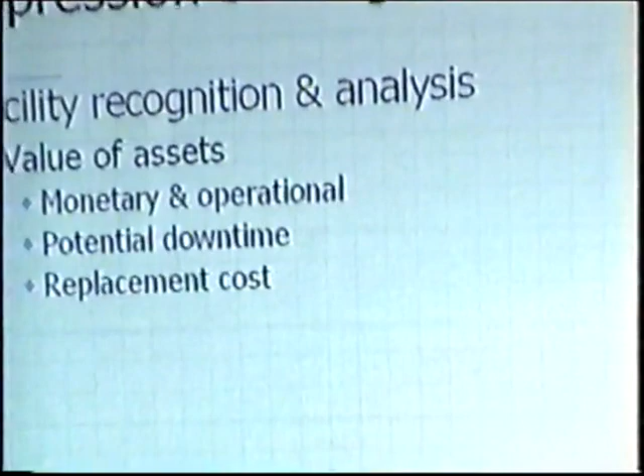So really what we're talking about with suppression strategies is facility recognition and analysis, where we look at value of assets, both monetary and operational, the potential downtime aspect, and then what the replacement costs are.

You may be able to replace certain things, but it's how long is it going to take and at what price. I know from my friends that work in the IT industry, even when they do an upgrade on the computer system on weekends that's supposed to take 2 hours, it usually takes 2 days. So nothing ever works right in bringing that up.

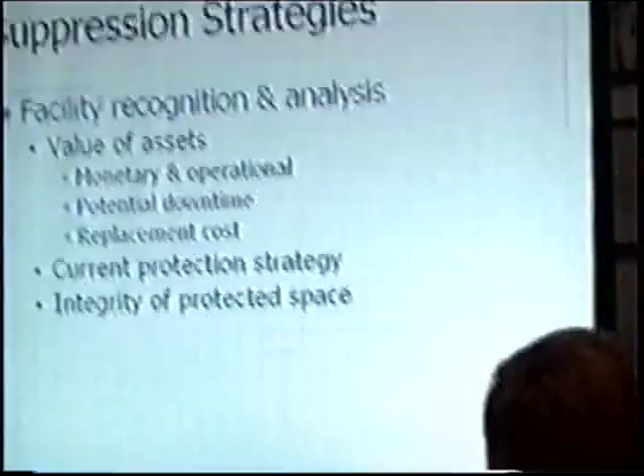Really, what you also want to look at is the current protection strategy that's employed. When looking at clean agent systems or waterless fire protection, you need to look at the integrity of the space, whether it can be sealed to hold the retention of the gas for a certain period of time.

Right now NFPA 2001 says gaseous agents shall hold for 10 minutes, but the authority having jurisdiction can reduce or increase that time as they see fit. I've seen authorities having jurisdiction go out during rush hour to the closest fire station to the site they're signing off on, and drive it. However long it takes them to get to that site is what the time's going to be. So it really depends.

Anytime we're putting any system in, we always have to check with regulatory and insurance influences. FM might want one thing, the authority having jurisdiction might want another. We're also going to look at the total cost of ownership and the overall risk within the facility.

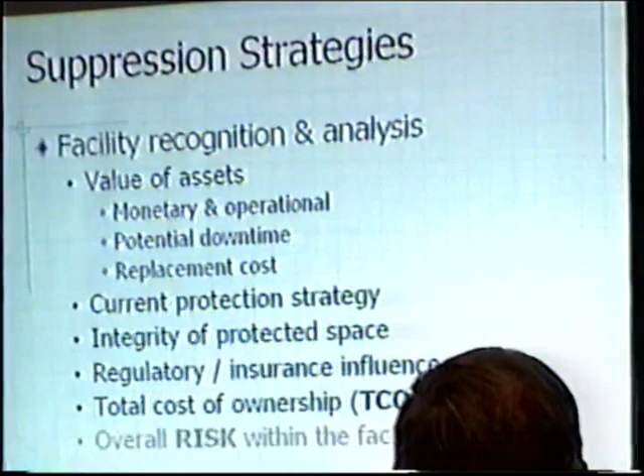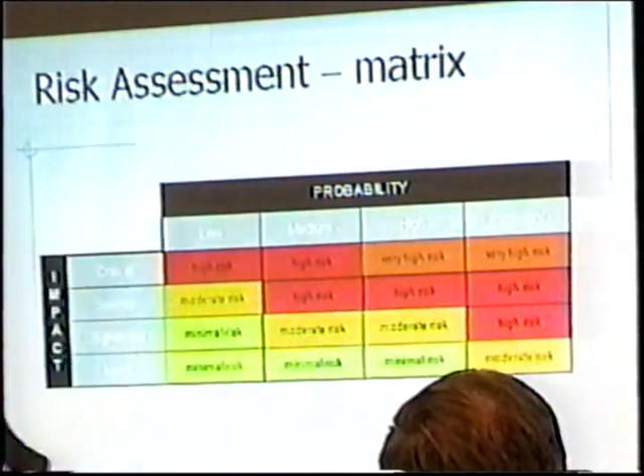This is a matrix that a lot of risk analysts look at when assessing a certain area, looking at probability versus impact. When we're looking at waterless or mission-critical type facilities, we're looking at facilities shaded in red or orange that may pose a probability that something might not happen, but if it does, it will definitely impact the business in a serious or critical nature.

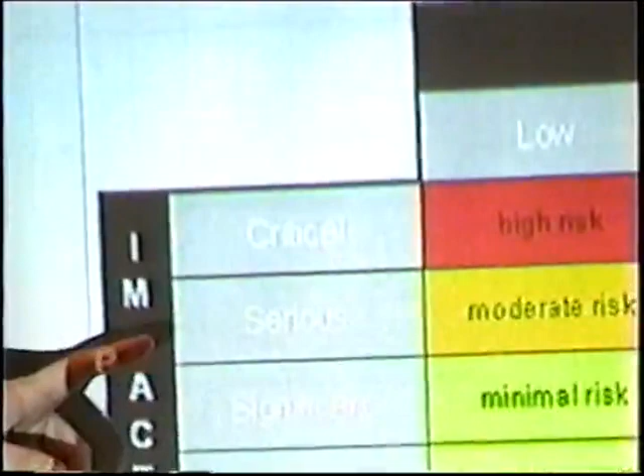Or you might have something that has a high probability of happening, and it may have a critical or minor type effect on the company itself.

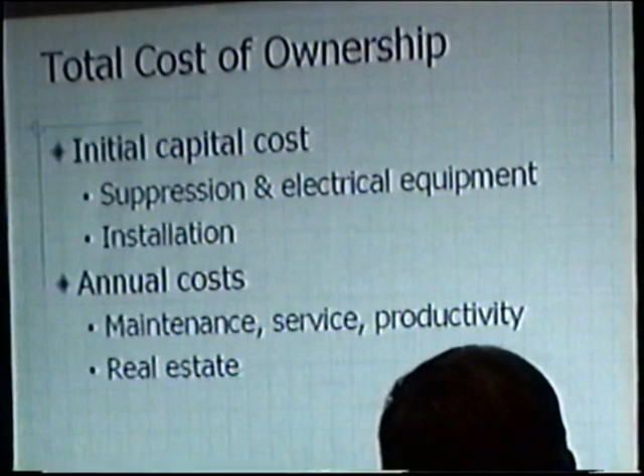When we're looking at total cost of ownership, we're looking at how much it's going to cost to initially install the suppression and electrical equipment, and how much the equipment itself is going to cost. But then also you have to look at the total cost of maintenance, service, productivity, and even some of the real estate that gets taken up.

Some of the total costs associated with system activation could be detrimental depending upon what system you choose as your method of fire protection, or if you choose fire protection at all.

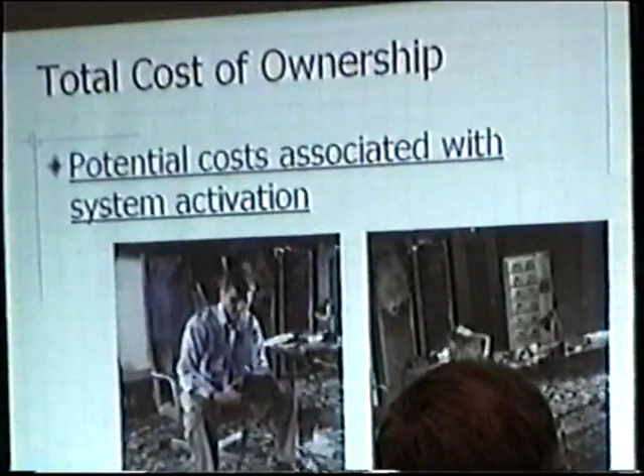So you may have some customers that don't have any protection. You may have some customers that say we're going to put in detection only - spot type detectors, air sampling, or something else. Then you have some customers that will just put in what's required by the International Building Code or local building ordinances just to get occupancy.

And that could be just putting in water-based systems, either wet or pre-action. But then, some companies, and most companies that have mission-critical facilities, are looking at putting in waterless systems or a clean agent.

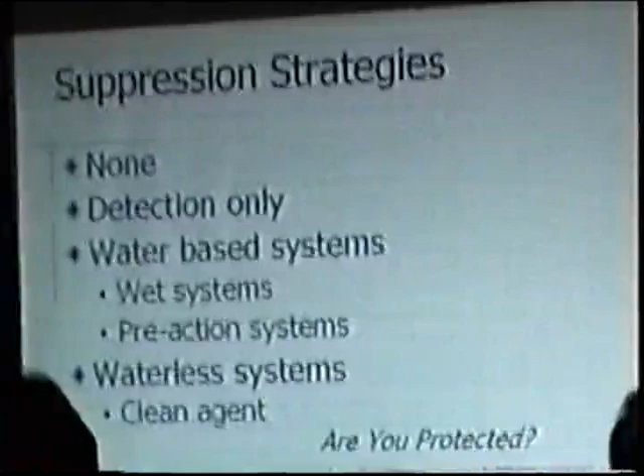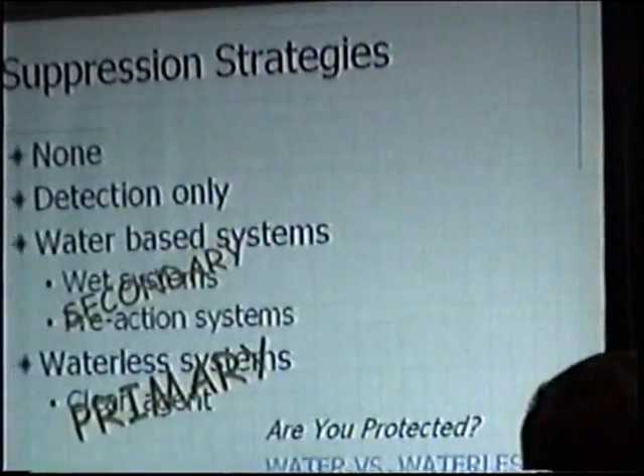This kind of goes back to what I said at the beginning, where waterless and water-based systems can work together - where your waterless or clean agent system could be your primary form of defense in stopping, or actually putting out, a fire and getting the customer back up and running in a timely fashion. But if something does happen where the fire grows to a catastrophic point, you want to have a pre-action or wet system as a backup.

And preferably, if we're going to be using sprinkler systems, you want to put a pre-action system in there just to keep the water back, because everybody's always afraid of a leaking pipe or something else happening in their data room.

So I have a quick video - I didn't bring my speakers, so I hope you guys can hear this. Some of you may have seen this. I'm only going to show the first few minutes, but it just shows the difference between having a water-based only system versus a clean agent as a primary output.

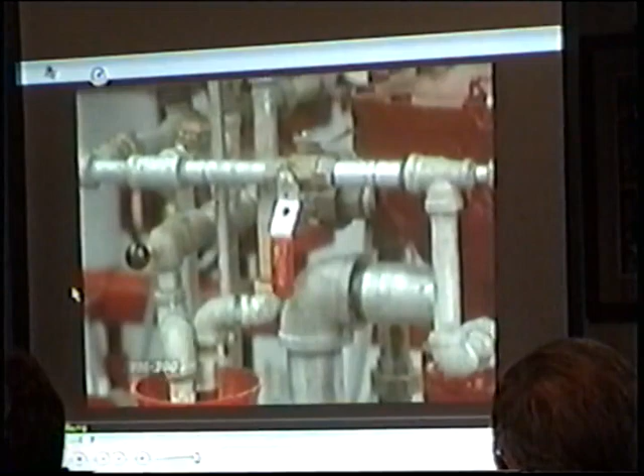After hours, suppose an electrical malfunction inside an equipment cabinet causes a spark to ignite. At 1 minute and 51 seconds, the system's detector senses smoke, sets off an alarm, and charges the pipes with water.

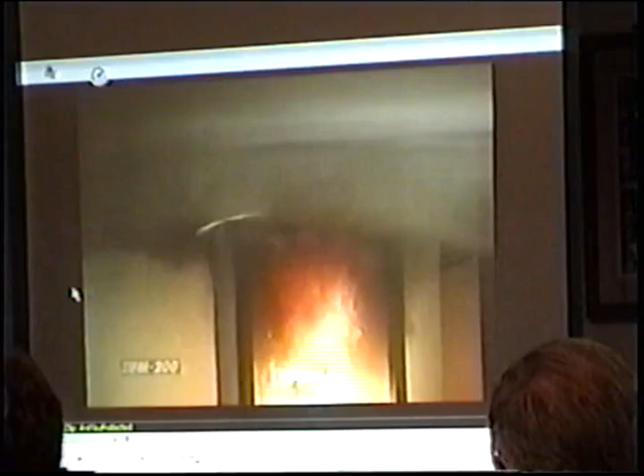As the fire continues to grow, the temperature of the ceiling directly above it will climb slowly until it is more than 500 degrees. The equipment inside the enclosure is now completely destroyed. Still, the temperature at the nearest sprinkler head stays below what's necessary to initiate the release of water.

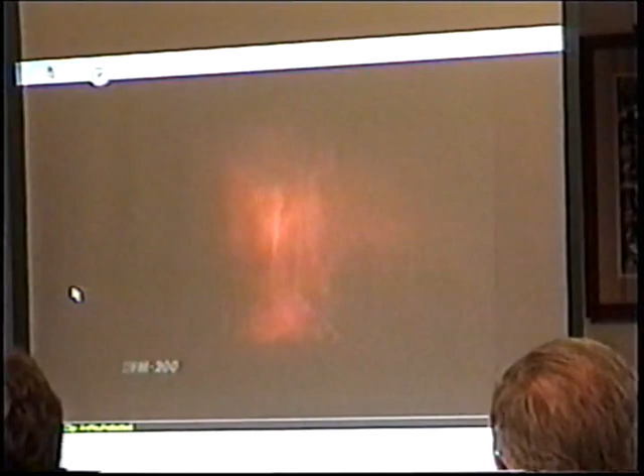At 9 minutes and 46 seconds, the sprinkler bulb bursts. Water is released at a flow rate of more than 18 gallons per minute. The room fills with smoke until there is no visibility. The infrared camera detects the flames contained and shielded inside the metal cabinet.

At 17 minutes, a firefighter arrives to investigate and finally puts the fire out.

The automatic sprinkler system in this office worked exactly as it was designed. After the fire grew large enough, it provided the minimum protection necessary to slow the fire's growth until the firefighters arrived to put it out. But the result of this minimum level of protection was an unacceptable level of damage to your business.

Chances are it would have saved your building and the lives of your employees. But would it have saved your business?

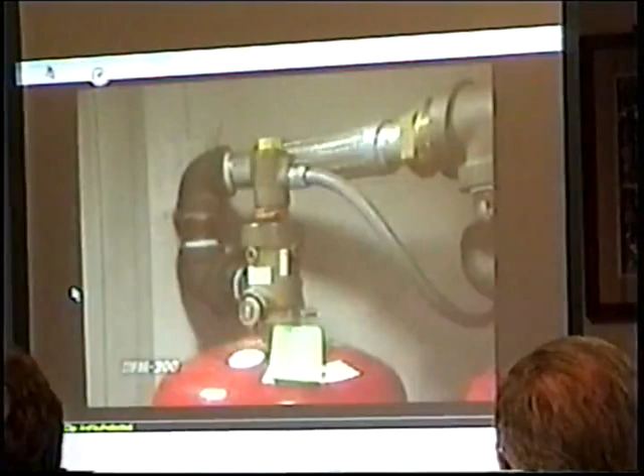Suppose instead you had an FM200 waterless system. Now this could be applied to any waterless fire suppression system. Suppose again it was after hours and an electrical malfunction inside an equipment cabinet causes a spark to ignite.

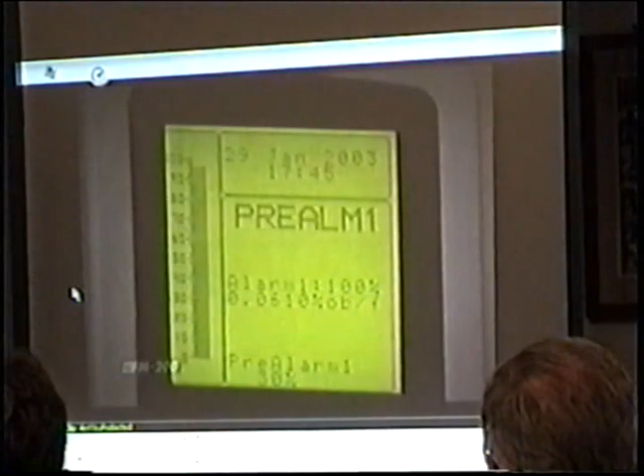At 32 seconds, the system's detector senses the first whiff of combustion. At 1 minute and 3 seconds, a first alarm is sounded. At 1 minute and 35 seconds, the system sounds a second alarm and begins a 30-second pre-discharge countdown.

At 2 minutes, 5 seconds, FM200 is released. 10 seconds later, the fire is out. An FM200 system provides maximum protection, resulting in minimum damage.

So that just kind of shows you the difference between a waterless system versus a water-based system. And the only reason that the water-based system didn't work in that particular scenario was because the cabinets formed a shield, so it wouldn't have penetrated the cabinets, where a gaseous agent, as it circulates through the whole entire room, gets into every nook, cranny, opening, or whatever to put out that fire.

So, like I said, we always suggest to any end user that we do business with, or that asks our opinion, that gaseous agents should be a primary form of putting the fire out, always backed up by a pre-action sprinkler, because really the sprinkler system is basically for structure and life safety, for structural integrity, where the waterless system is more concerned about the assets.

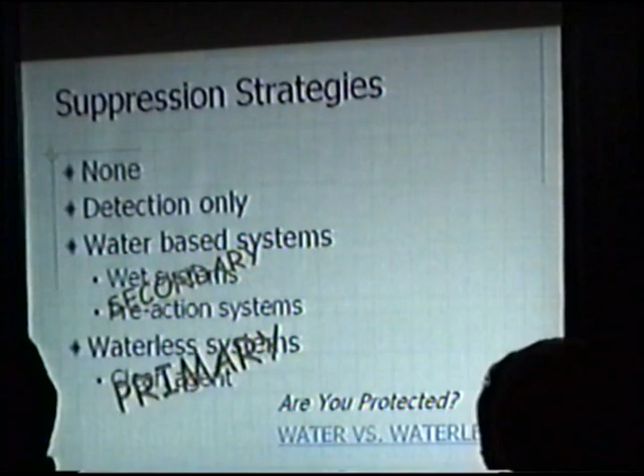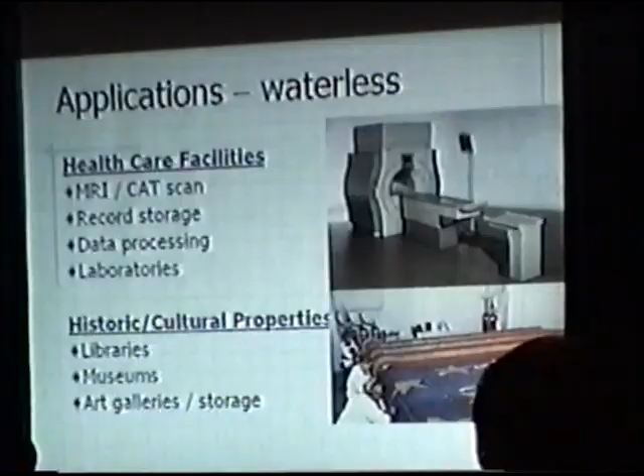So just some applications where we use waterless fire protection, clean agent systems: data processing, telecommunications, power gen, marine, industrial applications, healthcare. We use a lot of stuff in MRI facilities, record storage, especially with HIPAA. HIPAA in the healthcare industry is probably the biggest thing.

Every time you go to the doctors, they make you sign the form, or they don't divulge your information to anybody else other than you. Well, they also have a responsibility of keeping your records secure for 7 years, and that means from a fire protection aspect and from a security aspect.

So also the healthcare facilities are getting more IT-based. There's a big movement within the healthcare facilities to make your experience from the time that someone picks you up in the ambulance to the time you get to the hospital completely computerized. So they'll be able to zap your EKG and various other types of things right to the hospital before you get there.

They'll be able to assess what you need and then be able to roll the appropriate equipment in before you even get there and assign a room. And then also be able to use the data processing for in-home care. So if a physician or an in-home nurse comes in, they can look up that patient's records, see what their prescriptions are, whatever else they need to be taking.

So healthcare is becoming very much IT, and I don't know if you've been paying attention to the news, but I know that the new administration is concentrating heavily on infusing money into the healthcare system, for upgrades and various other things, not only just providing healthcare to everybody.

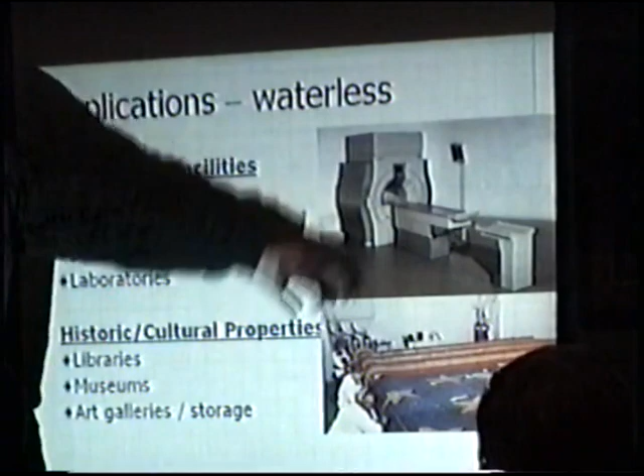One other story about healthcare: there was a fire, or an event, with an MRI unit where the board that moves the bed in and out of the MRI shorted out and started a fire. They couldn't get the guy out, but they had a gaseous system in there, and it put the fire out.

One big misnomer about gaseous systems is that people think they all take the oxygen out of the atmosphere. There are gaseous systems that do that when dealing with inerts like nitrogen, argon, CO2, and various other types. But clean agent gases like Novec 1230, FM 200, or others don't work that way - they extinguish by cooling rather than oxygen deprivation.

So is it still 5% concentration, or a little more? Different agents have different concentrations, and we'll go through that as we progress.

The first true clean agent out there, as far as suppression, was halon. It was fast-acting, minimal damage, safe for occupied spaces, but it had an ozone depletion potential. It was basically taken out via the Montreal Protocol back in 1988, and then finally phased out from production around 1991-92.

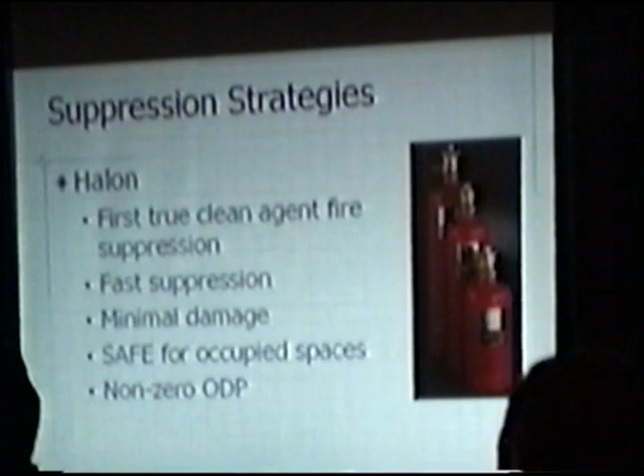So halon's still available, but only in a recycled state. Also, for guys more in consulting, telling customers what to do with their existing halon systems, a lot of manufacturers have stopped supporting the old halon systems. So rebuild kits or discharges - they may be able to source halon, but may not be able to rebuild the valves and put in the appropriate O-rings to bring that system back up and running. So halon is no longer available in brand new systems unless you're getting a used type system.

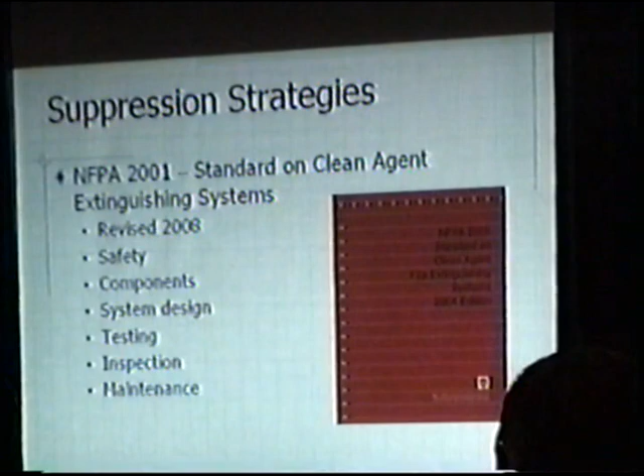Now, everything I'm going to talk about in the next few slides is governed by NFPA 2001. I believe Paul gave you a previous presentation with a synopsis on NFPA 2001, the standard on clean agent systems. It covers the safety, components, design, test, inspection, and maintenance of these types of systems.

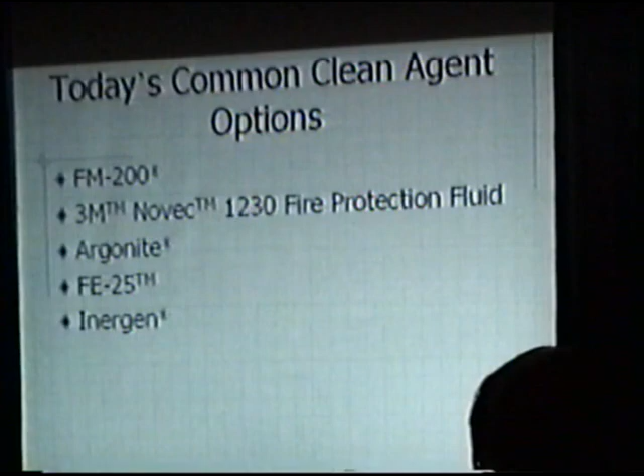Today's commonly used clean agent options are FM 200, Novec 1230, Argonite, FE25, and Inergen. Those are probably the most widely used that you'll see locally and nationally throughout the U.S.

Now, when talking about clean agents, one thing we want to cover is some different terminology I'll be using on a few slides. One is NOAEL, which is no observed adverse effects level. That means during testing, when they tested the agents back in 1992, when halon was being discontinued and they were searching for replacements, they basically tested it to a level where they didn't see cardiac sensitization.

And that is what they established as NOAEL, the no observed adverse effects level on the test subjects. Now there's a LOAEL level, which stands for lowest observed adverse effects level, which means they saw a blip. It could have been 1 out of 10, 1 out of 100, or 1 out of 10,000 tests. But what they did was establish that the minute they saw a blip, that's what they said was the lowest concentration at which they actually saw an adverse effect.

Then something new came out called the PBPK, the Physiologically Based Pharmacokinetic Model. You guys say that 10 times?

So what this is, it's a computer simulated test. It's kind of like saying, okay, this test tries to relate what the concentration will be at your heart at a given time for a given exposure period. But really this is more of a computer generated model. It's trying to say, if you have different subjects, someone who doesn't drink all the time versus someone who drinks every day, the effects are going to be different. But the computer model may say an average person weighing 120 pounds or 200 pounds is going to have this effect if they have 2 drinks in an hour. So that's really what it's doing.

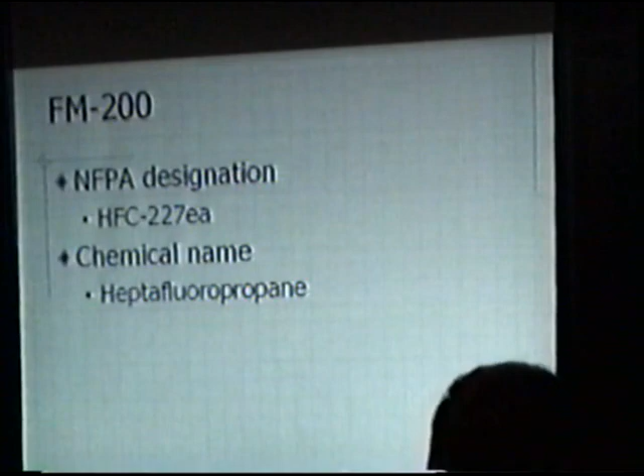So let's talk a little bit about FM200. FM200 has probably been the agent that's been out there the longest. HFC-227ea is its NFPA designation, also called heptafluoropropane. It's safe for occupied spaces and suppresses through heat absorption. The definition of a clean agent is that it does not leave a residue, does not conduct, will not wet or soak, and there's no agent-related downtime.

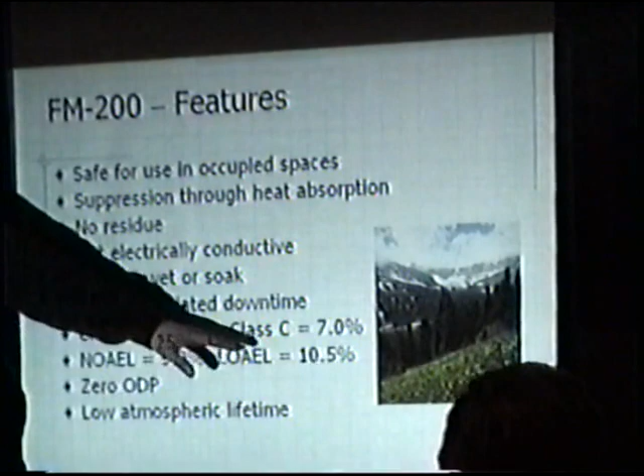Typically with the FM200 agent, the design concentration will be 6.25% for a Class A fire. For a Class C fire, the general guideline is a 7% design concentration. The no observed adverse effects level is 9%, and the lowest observed adverse effects level is 10.5%. So you have anywhere from the NOAEL level back down to the Class A level, about a 2.75% safety factor, and here about a 2% safety factor before you get to the NOAEL, and then even a 3.5% safety factor before LOAEL.

It does have zero ozone depletion potential. It also has a lower atmospheric lifetime than halon. Halon had an atmospheric lifetime of about 80 or 90 years. FM200 has an atmospheric lifetime of about 33 years, so it's still quite a bit.

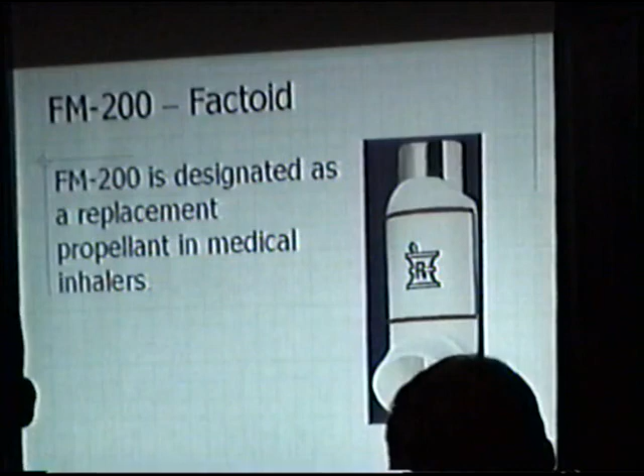Now, one thing FM200 has been used in is metered-dose inhalers as a replacement propellant, so it was tested by the FDA in medical inhalers.

Now, because FM200 has been on the marketplace for a long time, I'm going to talk a little bit about traditional delivery systems, and then some application-specific delivery systems you may want to be aware of. Traditional delivery systems are top discharge cylinders, bottom discharge, and spheres. Bottom discharge can be referred to as burst disc technology. And then we have application specifics.

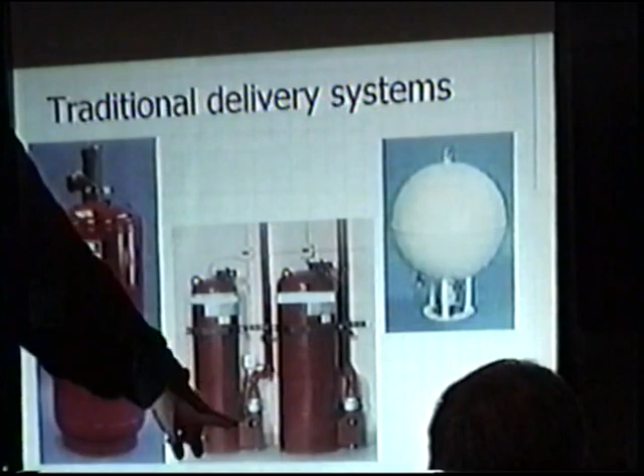So here is your top outlet cylinder. These would be your bottom discharge cylinders, hence they discharge from the bottom and have a burst disc in here. The spherical containers have a burst disc, which are either actuated by gas-actuated cartridges or initiators. The top outlet cylinders are mostly actuated by solenoids.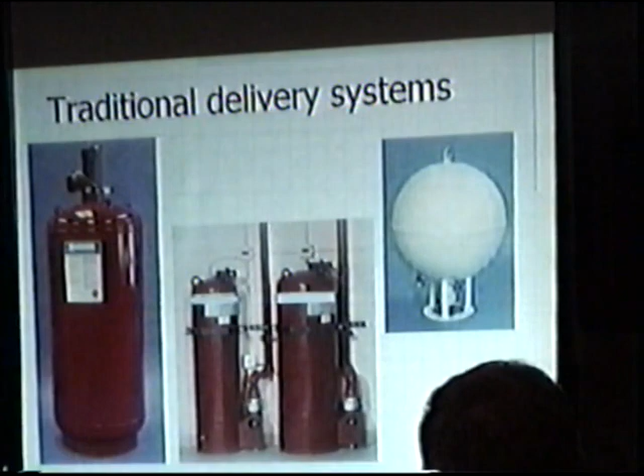Then you have agent or application-specific delivery, where you have complex pipe networks that may be a Halon 1301 retrofit, large open area facilities, or remote cylinder storage locations, where you may have a cylinder filled with FM200, and then a nitrogen propellant separate, which allows the agent to be pushed a lot farther than a standard system.

When you have a standard system, the tank may be filled to a certain percentage of total capacity, leaving only a certain amount of head space for nitrogen, which is pressurized at 360 psi. The minute the cylinder opens on a standard system, the pressure curve automatically degrades down to zero. So with a standard suppression system you may only push 50 to 60 feet of linear pipe, whereas with this type of system you may be able to push the agent 300 to 400 to 500 feet.

This is something to be aware of when doing Halon retrofits, because it allows us to use some of the similar piping that was used in the 1301 system. Although, I'll say this: there is no immediate drop-in replacement available for Halon 1301.

The reason is, I guarantee you, if you tested Halon 1301 to the standards that UL and FM and testing agencies put agents through today—flow splits, discharge time, arrival time balances—those old spaghetti Halon systems probably wouldn't work to today's standards. The only reason Halon systems worked back then was we were afforded the discharge test, which let us find out what the concentration was in a certain area. If we needed to bump up concentrations elsewhere, we could make modifications, add extra Halon to the tanks, recharge, and retest.

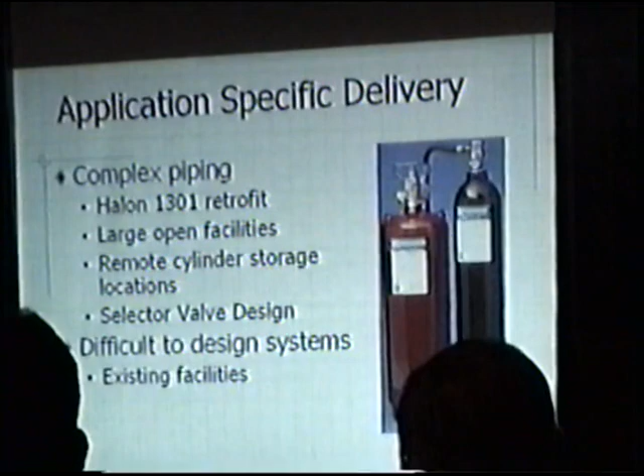With some application-specific design criteria with this particular array, you do have selector valve capabilities and also the capability of doing difficult design systems.

So how this works is you have gas and nitrogen in two separate systems. The nitrogen starts to discharge from the nitrogen cylinder into the FM200 cylinder itself, and then pushes it out—it's more like a piston effect.

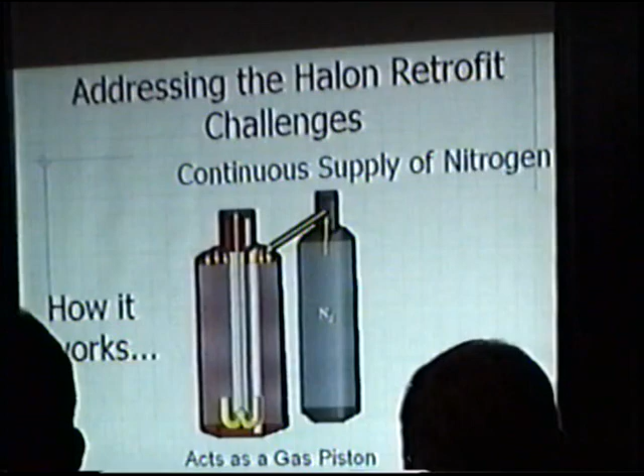What used to be a problem with Halon was that the cylinders were pre-charged, which became very hazardous to transport. That was a big problem. So if you're supplying separate nitrogen bottles instead of the actual storage tank, which is now no longer pressurized, it's easier to ship. The DOT qualifies hazardous goods for transport as anything over, I think, 7 or 8 PSI normal vapor pressure.

It still exceeds that—the normal vapor pressure of an FM200 gas is about 44 PSI. So you still have that residual problem; it's still stored or transported as a hazardous good.

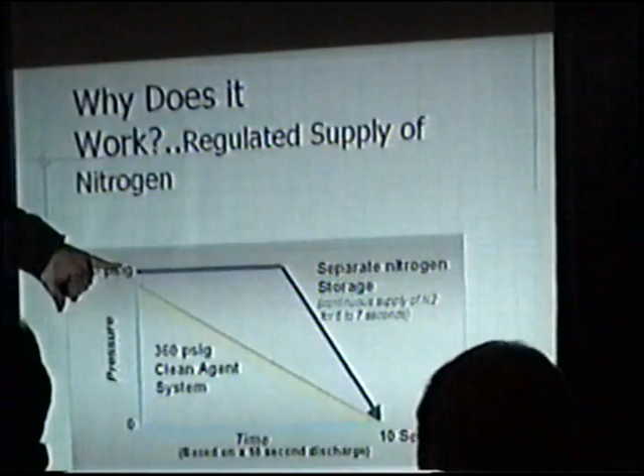This shows the difference I was talking about before: when you open up a standard system, the pressure automatically degrades, but we still have to make a 10-second discharge time. With the other system I showed, you're basically maintaining your nitrogen pressure for a longer period of time, but still maintaining your 10-second discharge time from delivery.

You also have application-specific systems with in-cabinet protection. Maybe a customer doesn't want to protect the whole entire area, but has a specific piece of equipment he wants to protect. You may see these in-cabinet systems on CNC machines, StorageTek silos, and various other hybrid applications.

So the strengths: cylinder storage space, rapid discharge and extinguishment properties, people safe, availability, field recharge support, and application-specific delivery. Weaknesses: recharge cost, and if you're using a traditional system, traditional system constraints.

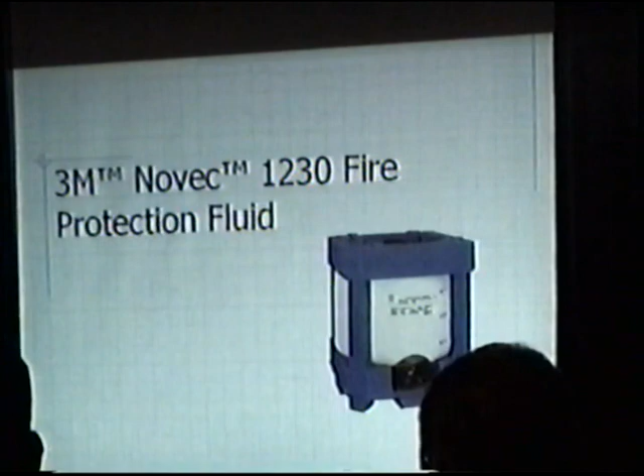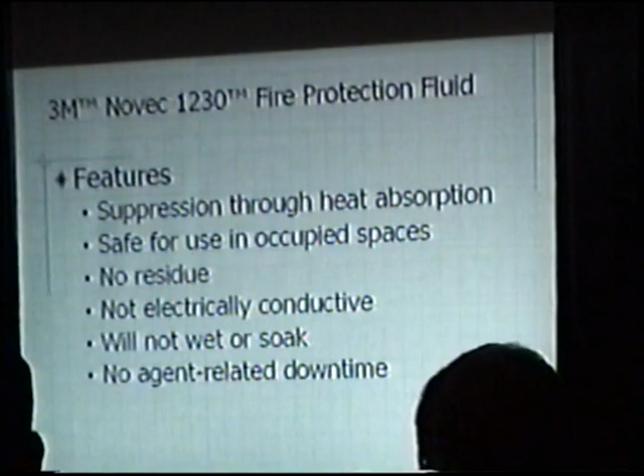The next agent available in the marketplace today is 3M's Novec 1230 fire protection fluid—its actual designation is FK5-1-12. It suppresses through heat absorption, so it does not deplete oxygen levels. It's safe for occupied spaces, leaves no residue, is not electrically conductive, won't wet or soak, and has no agent-related downtime. It's a liquid at room temperature.

How many people have seen Novec? Okay, I'm sure Paul here—everybody's seen it.

Basically it's a liquid at room temperature, but it wants to evaporate 50 times faster than water. So I can pour some off here, and I can see a vapor trail, even though you guys can't see this on camera.

So even though it exists as a liquid at room temperature, it wants to gasify. When it actually gets delivered through the nozzles, it atomizes into smaller molecules that allow the normal energy in the atmosphere to flash it into a gas. It's not like humidity, where if you lower the temperature it's going to drop down or condense over a period of time.

Now for Class A and Class C fires, this agent is rated for 4.2% by volume, so you still have 95.8% normal air in that room. Its NOAEL is 10%, its LOAEL is greater than 10%. This means we haven't really established an upper level yet, because the highest concentration I've seen for some of the most flammable liquids in Class B fires, and that's where your concentration levels will go up, is somewhere around 9%. So I think it's around 8.44.

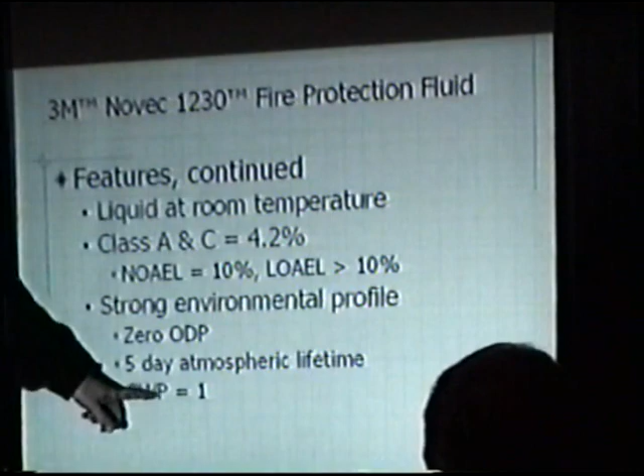The other thing is that the global warming potential is 1. I know there's a lot of debate today about greenhouse gases contributing to global warming, but this has a GWP of 1. Comparing it to FM200, which has a GWP of around 3,400, it's significantly better from an environmental aspect.

Now from a delivery system standpoint, this is a relatively newer product. It's been on the market since 2003, but traditional delivery systems prevail in its application. Not to say that something similar to what we saw with FM200 as far as delivery systems won't come out, but at this point you're dealing with a pressurized cylinder at 360 psi with the agent in it. The hardware being used is similar to Halon and FM200.

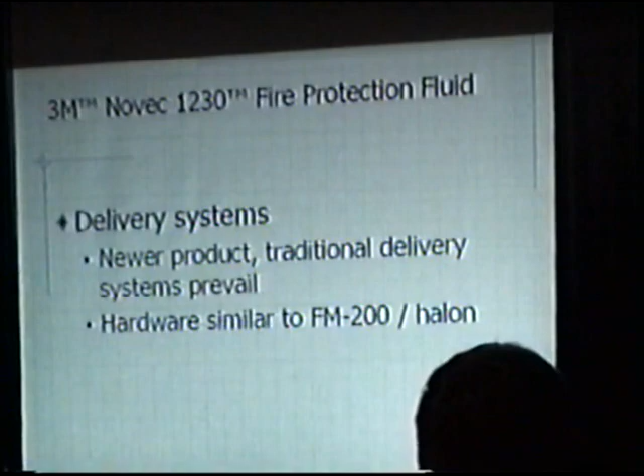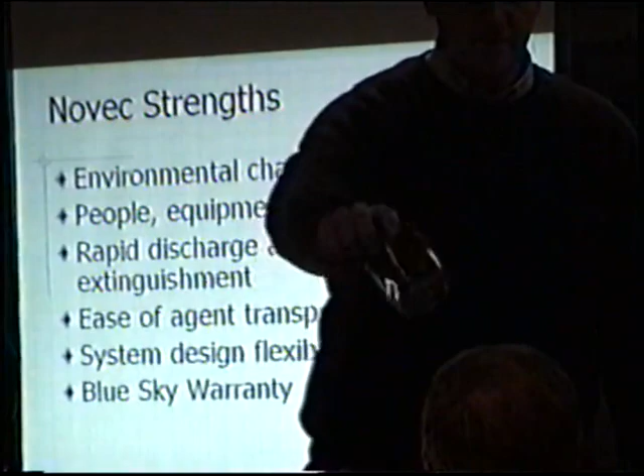One good thing about Novec is it's demonstrable. I'm sure you've probably seen this several times before, but I can just put a little drop in here. Shake it out. Nothing in there? Nothing on the sleeve? Nothing on there.

What you can see here is the smoke floating on top of the agent. That would actually represent your protected level, and anything underneath that protected level would actually be continuously suppressed. So if you had a 911 center or a data center or something else that they didn't want to shut down, that would continuously suppress that fire as long as the concentration was still in that room at that level.

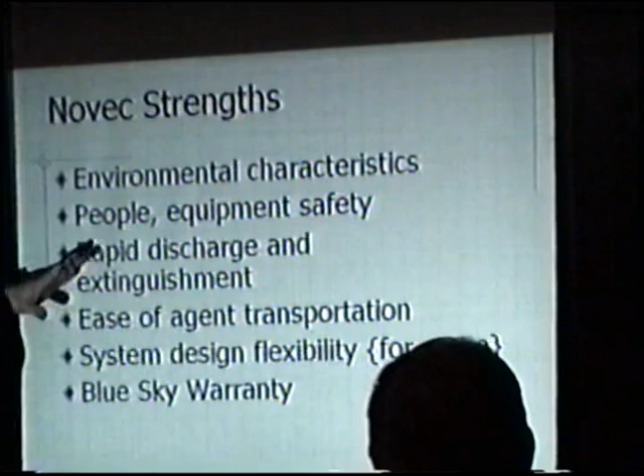So the strengths of Novec are its environmental characteristics, people and equipment safety, and rapid discharge. Again, it's going to discharge in 10 seconds. Now this is where this kind of differs from FM200 and Halon: the ease of agent transportation.

This goes back to your question, where if we ship Novec in its raw form, because it has a very low vapor pressure, it doesn't come under the DOT guidelines. So they could put thousands and thousands of pounds of the agent on a plane and ship it overseas, or ship it across the US and have it there the next day, or in hours, because it's not under DOT regulation as far as being able to fly. Whereas once you get over 350 pounds of something like FM200 gas, you have to truck it. So this is definitely a benefit when we're talking about that.

There is some system design flexibility, and it will vary by OEM, because Novec is just the agent. It depends on the performance of the system from the manufacturer that designs that particular system.

Another key part about Novec is that it offers the Blue Sky Warranty. What this is, more or less, is a backing. We hear about global warming potential, and we hear about agents maybe being phased out or going away. What the Blue Sky Warranty is saying is that if for any reason, when you install your system, in 20 years that system becomes mandated to be taken out, kind of like Halon was -- if legislation requires its removal, 3M will actually pay $18 a pound, I think that's what the going rate is in the Blue Sky Warranty.

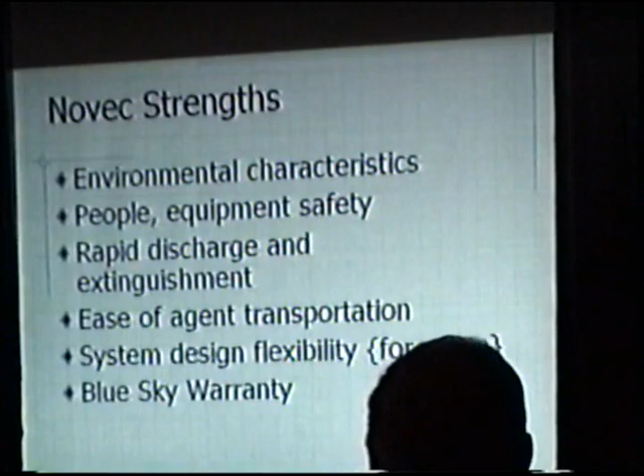So they're backing it up as far as the environmental characteristics of this agent and how it's going to benefit going forward. Now, some of the weaknesses: agent quantity required, and agent cost. Cost is always going to be a factor, whether it's Novec, FM200, or any of the other gases out there, because it's not free.

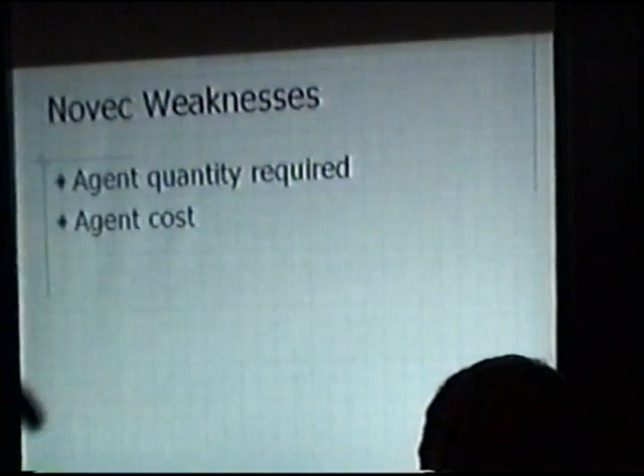Next one, FE25, known as HFC-125 or pentafluoroethane. It suppresses heat absorption. Its history is that it appeared in the early versions of the SNAP list back in 1992, when the agents were going through their testing, same time as FM200 and some of the others. The testing showed it was not viable for occupied spaces because its design concentration was actually above its NOAEL level.

So they did not allow it as part of the SNAP list for use in occupied spaces. DuPont elected to endorse FE13 for occupied spaces, but FE25 was successfully used in non-occupied applications and industrial explosion protection applications, because a lot of those areas were not occupied - bag houses, grain elevators, various other types of things. So in 1999, the PBPK model came out and allowed a more liberal interpretation of toxicology and egress restrictions.

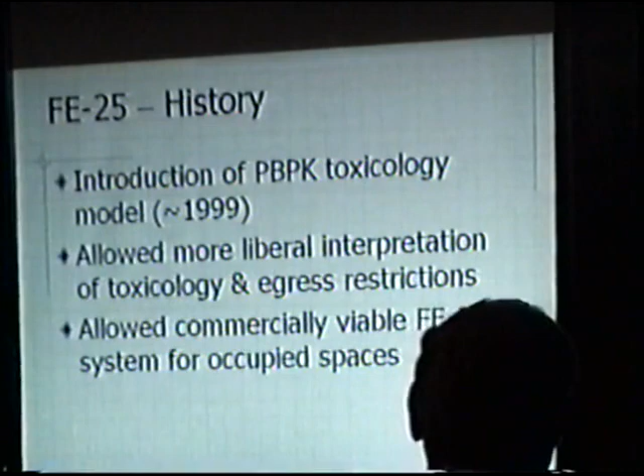So it allowed FE25 to become commercially viable for occupied spaces based upon the PBPK model itself. And why would you specifically select this versus FM200? Price? Yes. The strengths of FE25 are that it requires less agent than some of the other agents out there, and it's aggressively priced on a per pound basis. So if people are looking solely on price, this is the agent they kind of migrate to upfront.

Some of the weaknesses of the agent: it's marketed as the cheapest alternative. There's some concerns about the toxicology history, because although the PBPK is a computer simulated model, there hasn't been any further testing since back in '92 on that. Its design concentration is above the NOAEL. The NOAEL for the agent is 7.5%, its LOAEL is 10%. Its minimum design concentration for a Class A fire is 8%, anywhere between 8 and 8.5.

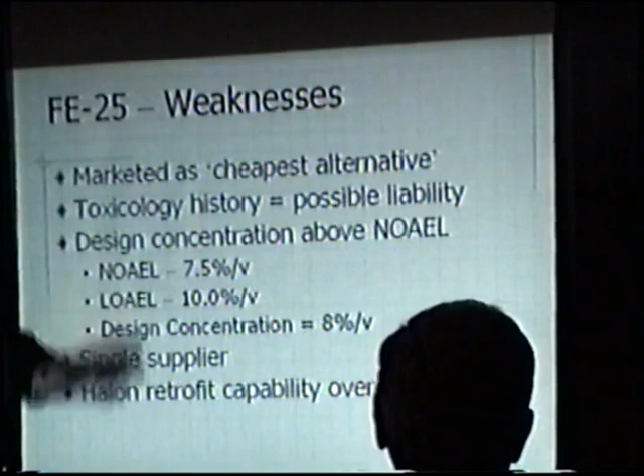There was only one single supplier offering FE25 through its supply chain. Also, I'd say the halon retrofit capability is overstated - it goes back to what I said before, there is no halon drop-in replacement. The one thing this statement was based on was that FE25 has a similar vapor pressure to halon. So you'd think it would flow the same, but it doesn't. It's not just this agent - could be FM200, could be Novec, could be anything else. It's not a halon drop-in replacement agent itself.

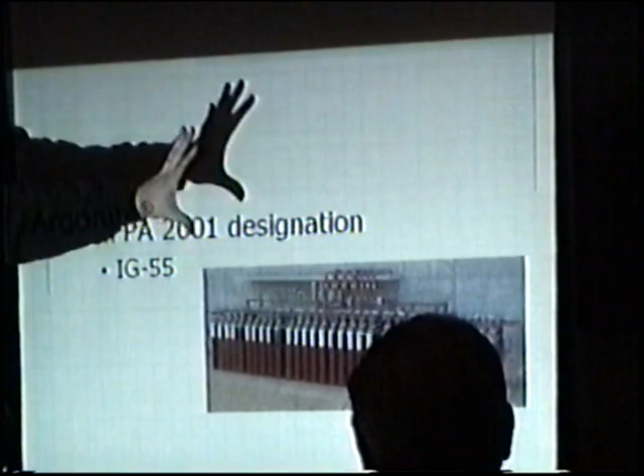Argonite. Now we're getting out of the first class of agents we talked about, the chemical agents, which didn't deplete oxygen levels but cooled the fire to put it out. Now we're going to talk about inert gases. The inert gases extinguish the fire by taking the oxygen level down from 21% down to about 12.9, 13%.

So this is a slew of bottles for an argonite system that was protecting a refinery, and the space was about 4,000 square feet with 12-foot ceilings. So this is actually what you would need to protect that area. I think there's some selector valves in here too, and there's a slave bank there.

But the one thing about inert gas systems is that, just like with any gaseous system, you have to take out all the hoses every 5 years and have them hydrostatically tested. And after you have a discharge, these have to be hydrostatically tested per the DOT regs. So even after a discharge, you have to pull all these tanks out, bring them to a refiller, and have them refilled.

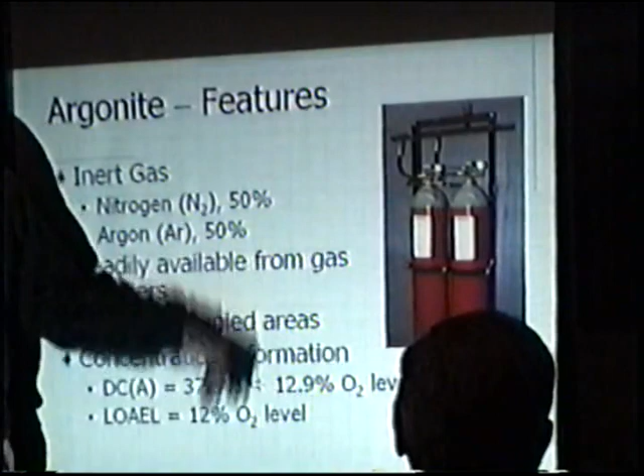With these types of systems, you have to do a little bit more due diligence. If you have a regular chemical system like FM200 and someone moves a wall in 3 feet, it may not affect the overall concentration to the point that it becomes hazardous. But if you move a wall 3 feet here and change a couple other things, it changes the whole perspective of how that system works and what the oxygen levels may be. So it's important that when a customer makes changes to the areas where an inert gas system is installed, they let the installing contractors know so they can re-verify the calculations.

So how is that for vapor pressure inside the containment area? As far as the pressurization of the room, after discharging the gas, is there more pressure? Yeah, there's more pressure because you're forcing in a higher concentration by volume of gas.

Is leakage a bigger issue? Yeah, you need more leakage, and actually you need to create man-made leakage on these types of systems. You get it in there, but the air that it's replacing is going to look for a place to go - it's got to push it out. So we always say with these types of systems, if you don't vent the room, the room will be vented at the end.

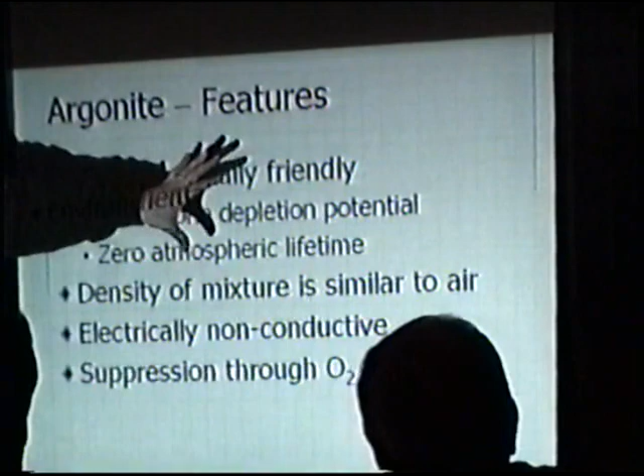One thing about venting is there's a calculation in each manufacturer's software when doing calculations for these types of systems - typically the software will calculate the area required based upon the volume of leakage. Then they have to compare that to the normal leakage of the room from the door fan test, and then put in the appropriate pressure relief vent.

There are different schools of thought. One is they'll have a vent that opens up for the first 10 seconds of discharge and then shuts. Another is more barometrically controlled, where once the pressure gets to a certain level in the room, it opens up, and as it equalizes, it shuts down.

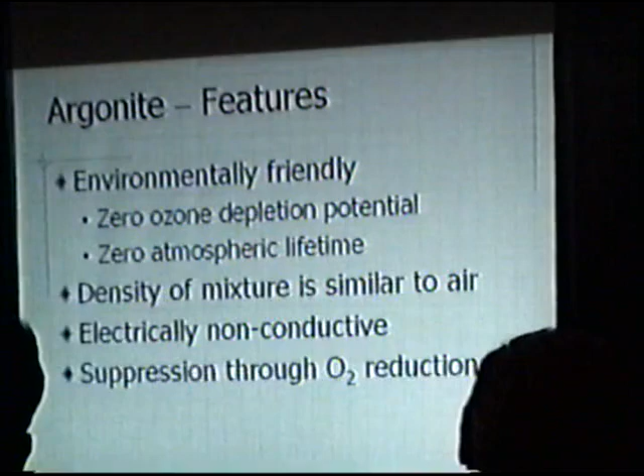But the benefit or features of this particular agent is it's zero ozone depletion potential, zero atmospheric lifetime. Density of the mixture is more similar to air, so if you have areas that can't necessarily be closed off or sealed for tightness like with some of the other agents, this may be a better solution. It's electrically non-conductive, but it does suppress the fire through O2 reduction.

It's environmentally friendly, cost-effective to refill on a per-pound basis, but it's very labor-intensive to pull all those cylinders out and have them refilled. It does not require airtight enclosures. You can use selector valves with this, and you can recharge by any gas supply depot.

Some of the weaknesses: it's costly and complex. It's a costly system because you're dealing with high pressure. Typically on an FM200 or Novec FE25 system, you're dealing with Schedule 40 pipe. With an inert gas system, you're dealing with typically Schedule 80 or Schedule 160, at least on the manifold up until the pressure reducer, then reducing down to Schedule 40 pipe. So there is significant cost because you're dealing with high pressure cylinders.

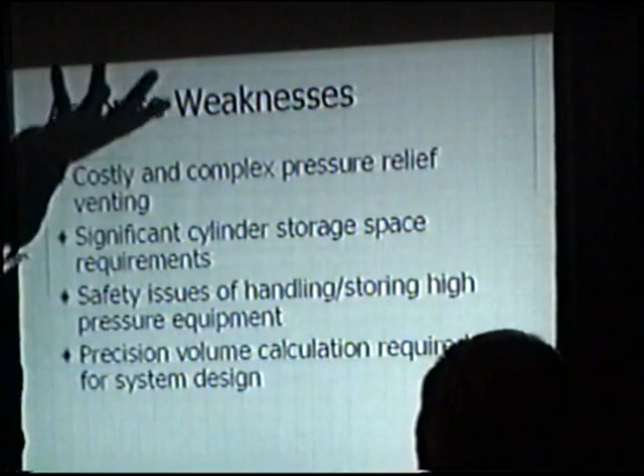You do need significant storage space for the cylinders. Typically a 27,000 cubic foot room, with FM200 or Novec FE25, you'd probably need somewhere around 1 or 2 cylinders. With an argonite system or inert gas system, you could be talking anywhere between 27 to 45 cylinders, depending on what gas you choose. Each cylinder takes up a 1x1 space.

That could be a major concern, and that's why I think in the U.S., inert gas systems probably make up about 5% of the total applications for clean agent fire suppression, while chemical agents make up about 95% of the applications. Now if you go to Europe, it's different - they're all about inert gases and very little about the chemical gases.

There are some safety issues with handling and storing high-pressure cylinders. And again, going back to what I talked about before, you need a precision volume calculation to make sure you're prescribing the right system design.

Now, Inergen. The only reason I'm talking about this is because it's a different inert gas with a different blend. It's a blend of nitrogen, argon, and CO2 - 52%, 40%, and 8%. That is a precise blend that has to be met.

The CO2 is in there because it's stated that it produces an increased breathing rate in an oxygen-deprived environment. But it also happens that a three-component mixture equals a proprietary mix. If you mix two components, it doesn't necessarily become proprietary.

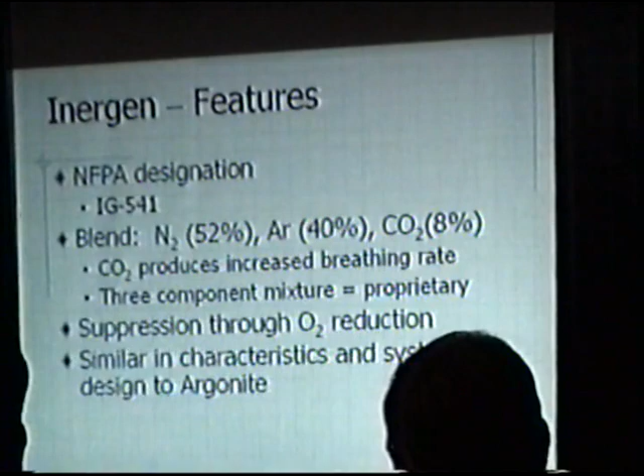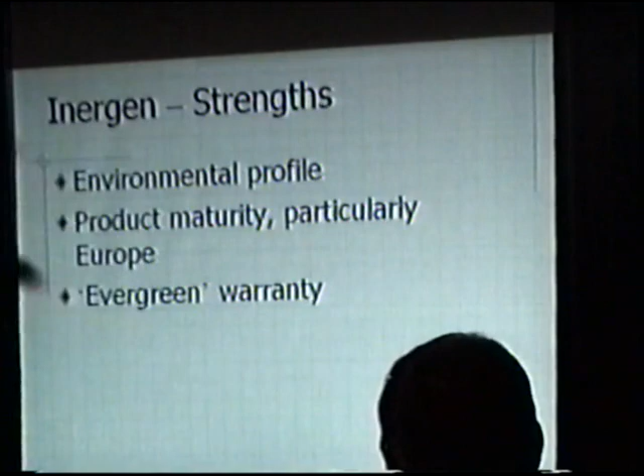Now, some of the strengths are its environmental profile and product maturity, particularly in Europe. They also offer something called the Evergreen warranty, which basically says if you have a fire, they'll replace your gas at no cost, but you still have to pay for the labor charges of taking out all those cylinders, transporting them, and having a customer down for a certain period of time.

As far as weaknesses go: hardware intensive, high pressure discharge, pressure venting required, and realistic recharge availability issues because it's a three gas blend with CO2, which creates difficulty in recharge. It must be filled and certified by an authorized gas blender, and the blender has to sign off that it's been filled to those particular requirements.

Because if you put too much CO2 in it, you can cause the O2 level to go down. But typically, whether it's an Inergen or Argonite or anything else, you're going to have definite increased costs in large systems. If you compare a chemical-based system versus an inert gas-based system, you're probably looking at about a 20% price differential because of the high-pressure hardware and piping required.

Again, chemical agents require Schedule 40, Class 300 fittings. Inert gases require Schedule 80 or Schedule 160, Class 3000 fittings.

So that's it pretty much on the suppression side. Any questions? If I lulled you to sleep? Anybody awake?

We're just going to talk a little bit about detection options that are out there for mission-critical facilities. Really, we're going to talk about the first two: spot-type smoke detectors and air sampling. There are also beam and video, but in mission-critical facilities, when you're looking at protecting or releasing a suppression system, you don't necessarily always want to use these.

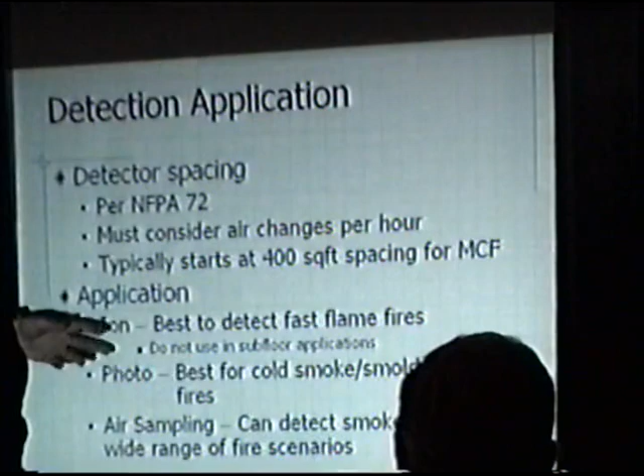That's why you see a lot of photoelectric detectors being used in duct detectors and subfloors. Even now, with the adjustable sensitivity of addressable systems, you can take a photoelectric detector and make it a little less sensitive. Before, when you were stuck with conventional systems, typically in an open area arrangement, you would somewhat mix ions and photos together. But now, with the adjustable sensitivity of the detectors, a lot of applications have just gone strictly photo and adjusted their sensitivities accordingly to the application itself.

Then you have air sampling. Air sampling can detect smoke from a wide range of fire scenarios, from fast flame to smoldering to various other types. Now, just kind of comparing response time when looking at point detectors: heat, flame, smoke.

You have air sampling that can detect and respond to a fire within, or at least get the first whiff within 30 seconds. Smoke detectors could take about 5 to 8 minutes. And then with sprinklers, you're relying on thermal transfer and need a lot of heat generation—you could talk about a 30-minute lag time between when the fire starts to when it gets going to when it actually activates the thermal link.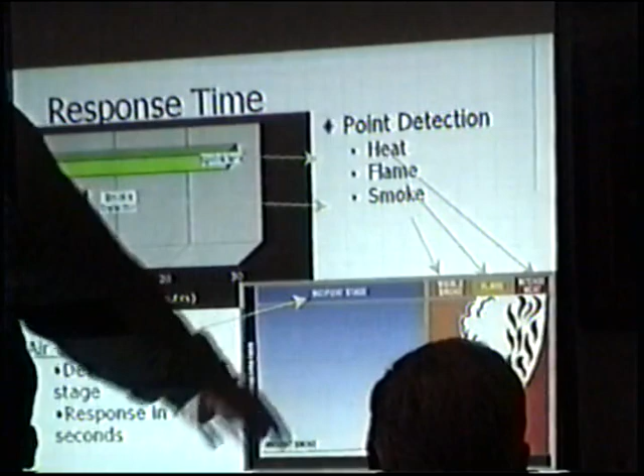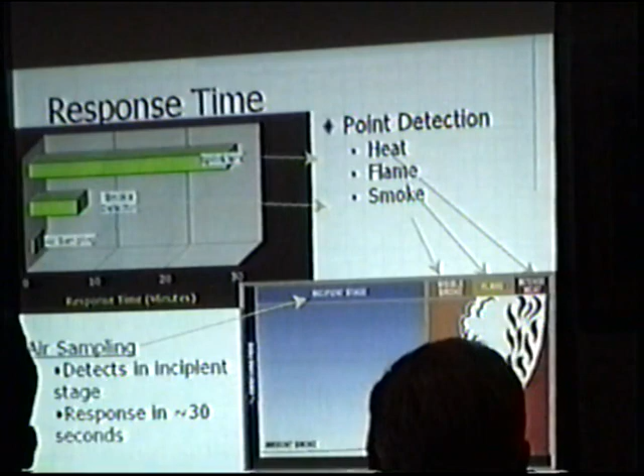So you're talking about air sampling systems. They detect fire in the incipient stage, which is the lowest level of smoke out there. When we talk about incipient stage, it's kind of like starting up your heaters for the first time in the winter—or when I was in the hotel and started up the heater, you could kind of smell it, but you can't see it. That's really what air sampling is grabbing.

Because when you're dealing with mission critical facilities, most of the time you're having conditioned air. Air changes are constantly being pulled in, pulled out, and also you have dilution. A lot of times fires can be on a PCB board—it could be a capacitor, a resistor, a UPS, something that starts off as a relatively low energy fire.

This is trying to give you, the air sampling system will give you the advanced warning so that you can go in 30 minutes, an hour, a couple days, depending upon what's burning.

There's been some tests where you got the big 480 feeder lines into a data center. It may take a couple days for that big cable to heat up versus a 22 gauge wire, which can heat up and then automatically fuse and burn up instantaneously. So it just gives you—it's basically detecting off-gassing, plasticizers, and various other stuff that's given off by overheating components in the electronics and various other things.

So when you're talking about heat or smoke, your conventional smoke detector is really detecting smoke in the visible stage. I used to call it—you go away from college, you've been used to your mom's cooking, and you're cooking for the first time in your own apartment. You forget about the stuff in the oven, you open it up and get the big plume of smoke, and next thing you know your apartment's full of smoke and you can't see, so you're opening the windows. That's pretty much what smoke detectors are looking at.

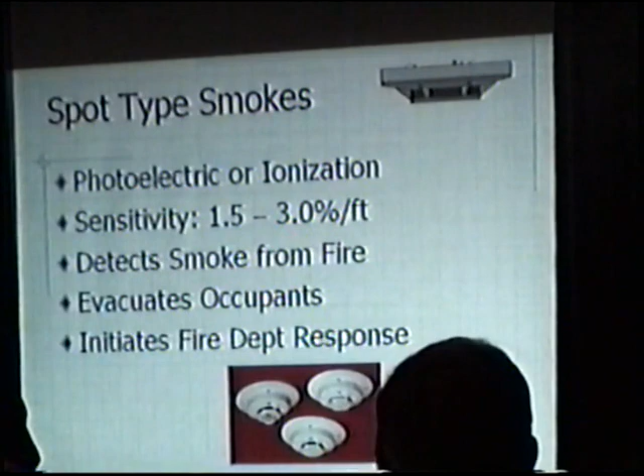Flame detectors are self-explanatory—they detect it in the flame stage, and heat detectors will detect it in the heat stage. So your photoelectric and ionization detectors have a sensitivity anywhere between 1.5 to 3% per foot to detect smoke from a fire. It's really meant to evacuate your occupants and initiate your fire department response.

Air sampling systems can be as sensitive as 0.00015% to 0.3%, or some 0.00046% to 7.62%. And the difference between air sampling and spot type detection is, spot type detection has a fixed point—at that point, it has to meet that criteria.

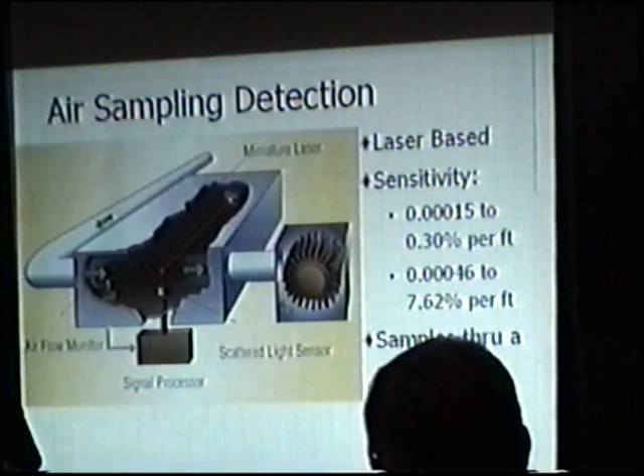Air sampling systems sample through a piping network. So you can have a fire that starts over here, but if it gets drawn up into the air handling system and then diluted throughout the area, you have a pickup point here, a pickup point here, a pickup point here—it's all bringing you back to one common point. So on a spot type basis, you may not have enough to trip the spot type detector that might be sitting right here.

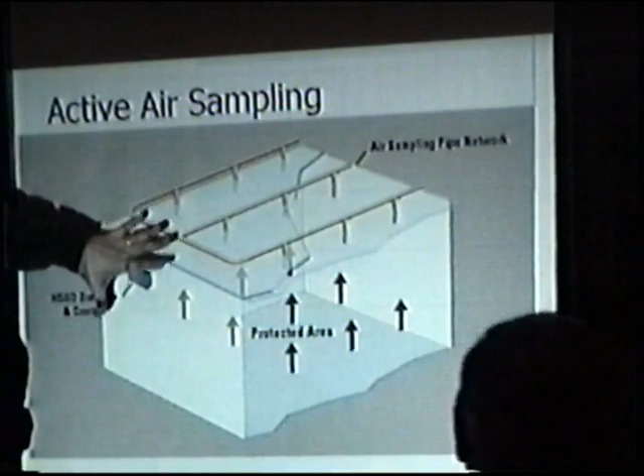But cumulatively, on an air sampling system, you'd be able to pull that air back, analyze it, and then find the particulates of combustion well before the spot type detector. Air sampling systems are about 1,000 times more sensitive than spot type detectors. They detect invisible products of combustion, outgassings of plasticizers, overheated PVC wire insulation, overheated electrical components, and it's actually detecting it before there is a fire.

This is a report put out in 1993 about network reliability in the telecom industry. They found that 90 to 95% of the damage caused in telco facilities, and this could definitely go for data centers too, is not caused by the actual fire, it's caused by the smoke. Things with fiber optics and other components are more sensitive, especially transmitters and receivers. Smoke can impair and corrode equipment because of the caustic materials created as the fire burns.

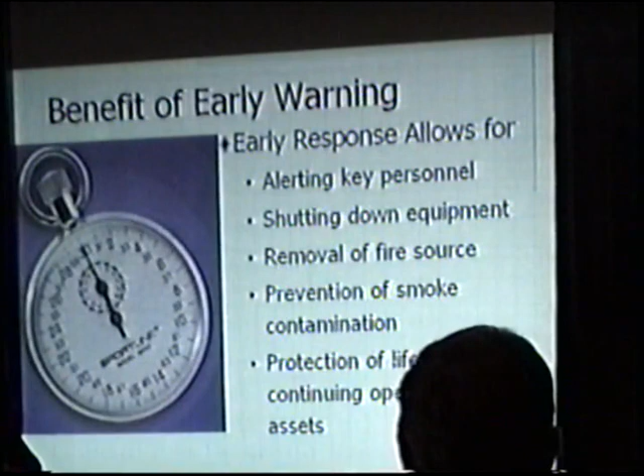So with an early warning system like an air sampling system, you're basically alerting key personnel, shutting down equipment, removing the fire source, preventing smoke contamination, protecting life safety, and allowing continued operation of the assets.

When using these alongside clean agent or gaseous fire protection systems, you really want to use both. One is not a substitute for the other. The air sampling system gives you the earliest warning, detecting an issue before it becomes a fire, turning it into a maintenance response rather than a fire response, and also preventing business interruption.

If I can get in there and know 30 minutes prior to anything becoming a major event, it gives me a chance to take the board out, replace it, isolate my systems, and then be business as usual. A perfect example would be a fire at a reservations facility for a major airline.

They had air sampling systems in that facility as their first line of defense, with a gaseous agent system as backup. The air sampling system detected the fire well before it became one — it was an overheating resistor, a blown capacitor, and the PCB board solder track starting to burn.

So they alerted the personnel there, and they were able to migrate all the data over to their backup servers, pull the board out, replace it, and migrate everything back. The reservation staff and others on the front lines talking to customers didn't know anything happened.

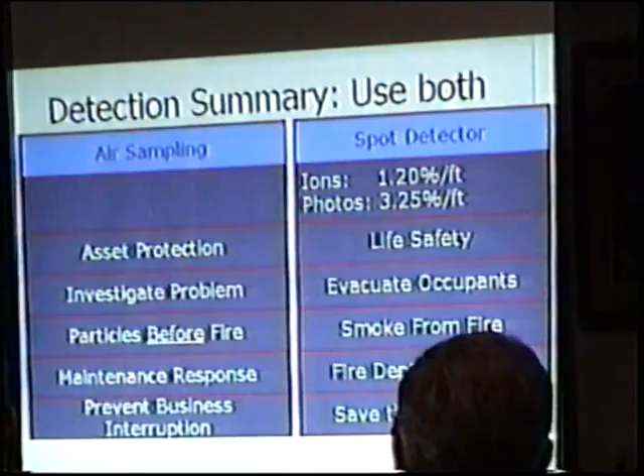When you're talking about a single detector, you're talking about a single string of tubing into one sample, versus two sets of tubing into two samples, or one set of tubing plus a spot-type detector.

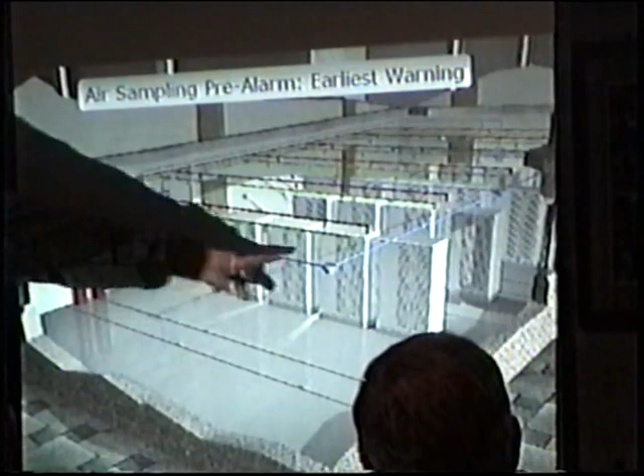Sometimes when you put spot-type detectors in the room, you can cut down on installation costs by having one detector cover a section, and then a sampling pipe or sampling point cover the next required spacing — alternating sampling point, spot-type detector, sampling point, spot-type detector. That way you're meeting the zoning requirements while also getting the concurring feature, so the system isn't discharging off of just a single detector.

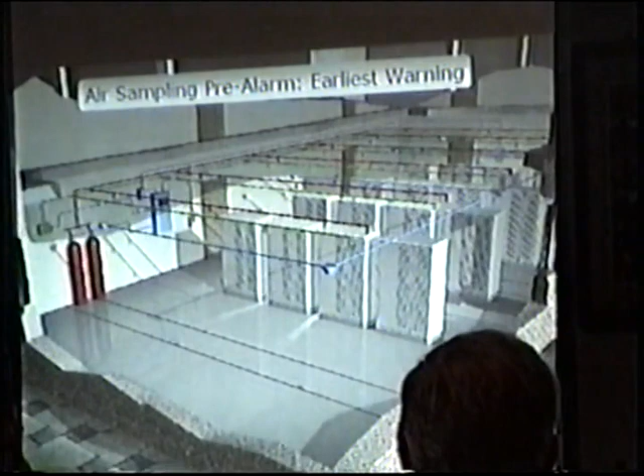Does sensitivity drive the flow every time? The sensitivity depends. If it's an addressable system, you could adjust it on the fly in some systems — if an air sampling system goes off, you get that input and could change the sensitivity in the panel on all the detectors in that room. Otherwise, on other systems, it might be whatever the detector is preset at. If someone sets it at 1.5%, it's going to stay at 1.5%.

Typically, for a photoelectric detector, it's probably on addressable systems, they may arrange it to be 2% per foot. So the idea is that when your maintenance guy goes in there on an alarm, he can then basically increase the detection on the other unit so that it doesn't go off while he's working on it. Is that kind of the idea?

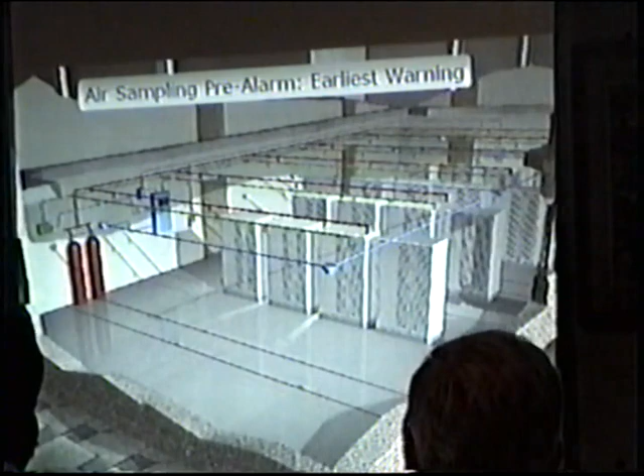Yeah, you could do that. And it's just a temporary thing, or we set it when we leave? Yeah, it would just be, well, I mean, it's kind of a feature that's more or less on the Fenwal side.

But I can tell you, speaking from our systems, that if we get an air sampling system going off, as long as that alarm's in, we can drop the sensitivities to a preset level of what we want it to be after getting that first alarm in. So you can make a quicker response. Is that an automated function then? Yes.

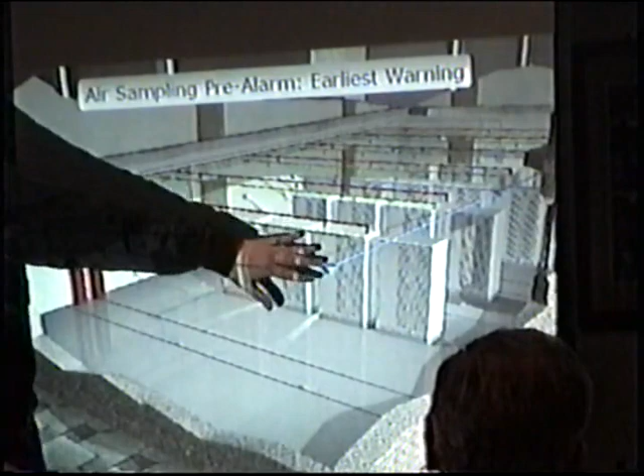Okay, so you can do that. And other systems may have the capability of doing that, but if they don't, then you're just going to be at whatever the installer sets the detectors to. They won't be able to necessarily adjust that. But it can be done.

So with air sampling, you're getting the earliest warning. You're being able to take action sooner and stop the fire before combustion. But then you also want to cross over air sampling with spot type detectors for suppression release.

As far as system solutions go, for a mission critical facility you want to look at detection. Really what you want to do is look at smoke. You don't want to necessarily have heat detectors in mission critical facilities unless you're protecting a generator room. That's really where heat detectors are for backup generators. But as far as smoke detectors go, that's where they're more universally used in those type of areas.

The bad thing about using heat detectors in mission critical areas is that you have thermal lag, you don't get the quick response, and usually by the time you get a heat detector to go off, something's going to be fully involved.

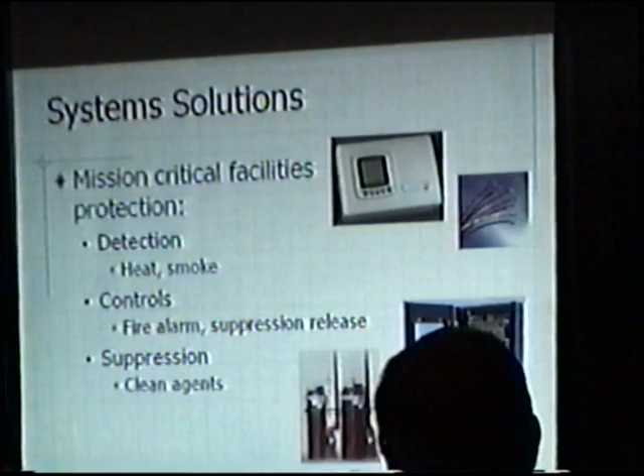Then as far as controls go, you get your fire alarm, suppression release panel, and then as far as suppression goes, you have your clean agent systems.

So really in conclusion, you want to understand and assess the risk. We want to look at the total cost of ownership because some of these mission critical facilities aren't necessarily an office space or a conference room or a big assembly area like this. It's more or less the areas that are going to be pertinent to the survival of a business, whether it's from a records perspective or from an IT perspective.

A lot of times county halls have all your deeds, all your records of ownership. If some of those aren't backed up somewhere, and there was a fire there, you couldn't prove that you actually own your house. So that's really what it comes down to.

Talk about, seek subject matter experts. I know there's various fire protection companies in here. From my perspective, we work with Electric Scientific. They've been in business for about 30 plus years doing fire protection, maybe a little bit more. But basically the people that are dealing with suppression agents and mission critical facilities on a regular basis are going to be the people that can tell you how they did certain applications, what they did, how they applied their products to meet the requirement of an end user.

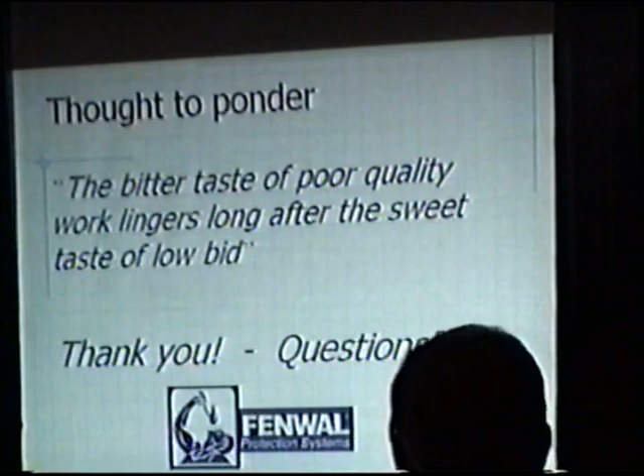Any questions? Well, I think all the questions have been asked. No? You're going to ask a question right there. No, he knows everything. Subject matter expert.